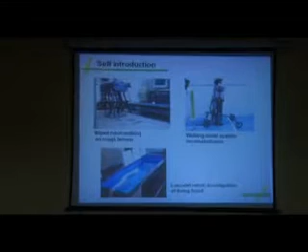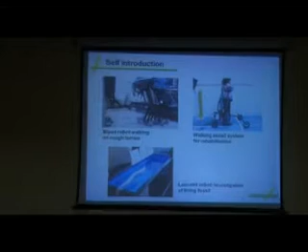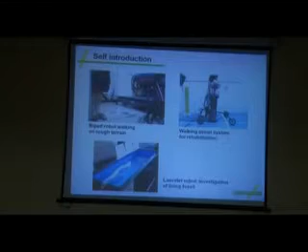I study robotics in Japan. As I study about robots, my first study was about biped robots walking. This is the robot walking in rough terrain. Although there are some obstacles on the ground, this robot can keep walking. This is my first work, and I extended this to a human support system for rehabilitation.

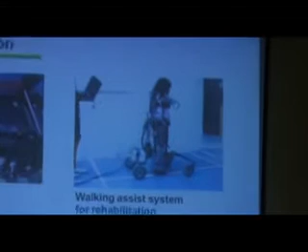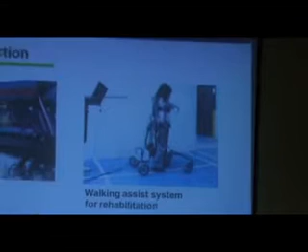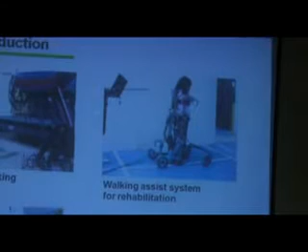This child has some difficulty walking in the leg because of an injury. If we give a walking pattern, then the children can, in some cases, learn how to walk. This is the experiment to give the walking pattern to the child as a rehabilitation.

So in this kind of system, force sensing is very important. Because many people think that a robot is maybe useful, but it's a bit scary because a robot is quite strong and it may injure people.

In communication between human and human, even if someone has very strong power, it is quite rare that people get injured, because people know the force information. If you apply strong force, then the person may be injured. And if the person doesn't know how to control the force, then the other one may have some kind of injury.

Extending this to human and robot interaction, robots are quite dangerous now because most robots don't know how force is acting on them.

So if you go to a manufacturer, for example a car factory, there are a lot of robots working for the car industry. And if you go near the robot, you may soon get injured, because the robot is quite strong and doesn't know how the force is acting.

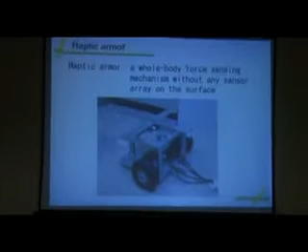I will explain the detail of this system tomorrow. I established a force sensing mechanism composed simply of an acrylic cover and a force sensor. This blue part - the idea is very simple. If there's a robot, in order for the robot to know force information, every robot has a cover, and...

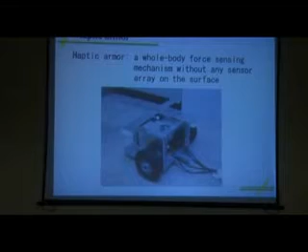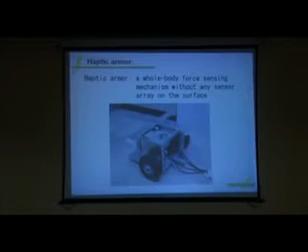if the force sensor - the cover is attached to a force sensor, then every force on the cover will be detected with this one force sensor.

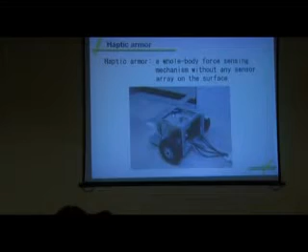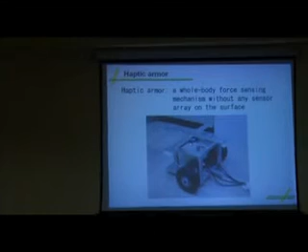The idea is that a human has skin, and in the skin there are thousands of sensors - force detectors and pressure detectors. But it is quite difficult for robots to have such skin. So the idea is that with one simple force sensor, the robot can detect force information, and by calculation, it is also possible to see the position of the contact point.

This is the experimental demonstration to show that if we touch this acrylic cover, it can detect the force vector and the force acting point from calculation. So we are trying to apply this to some things.

Okay, I'll skip most of these things. Please see the presentation tomorrow in detail.